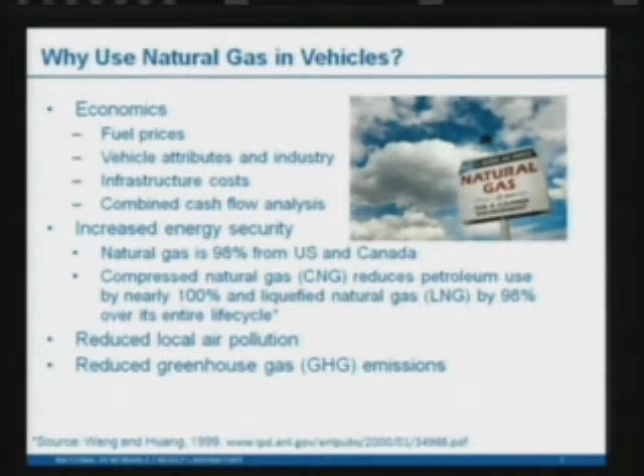But first, I'd like to start with a 30,000-foot view and ask the question, why use natural gas vehicles? There's a lot of companies and individuals using them, which goes a long way to answering why there's a big interest in natural gas vehicles right now. One reason is the economics, which I'll spend a majority of my presentation on, looking at fuel prices, vehicle attributes, the vehicle industry, and the infrastructure.

Another major advantage of natural gas vehicles is increased energy security. Natural gas is 98% from the U.S. and Canada, and right now, with gasoline and diesel prices skyrocketing because of geopolitical events, it's a particularly timely discussion.

Another benefit of natural gas in vehicles is that if you look at the full life cycle of natural gas, it uses hardly any petroleum, whereas a lot of other alternative fuels use varying amounts of petroleum to extract, grow, or transport. That's another major advantage of natural gas in vehicles.

It also reduces local air pollution and greenhouse gas emissions, which I'll talk about in upcoming slides.

The primary driver for why companies, mostly fleets, want to use natural gas is the difference between the diesel or gasoline cost and the CNG cost. All natural gas projects require an upfront investment that needs to be paid off with fuel savings. That fuel savings has been consistent and growing over the years, and EIA projects that difference to keep growing. So the per GGE, or gasoline gallon equivalent, difference between natural gas and petroleum fuels is projected to grow, and the savings will increase.

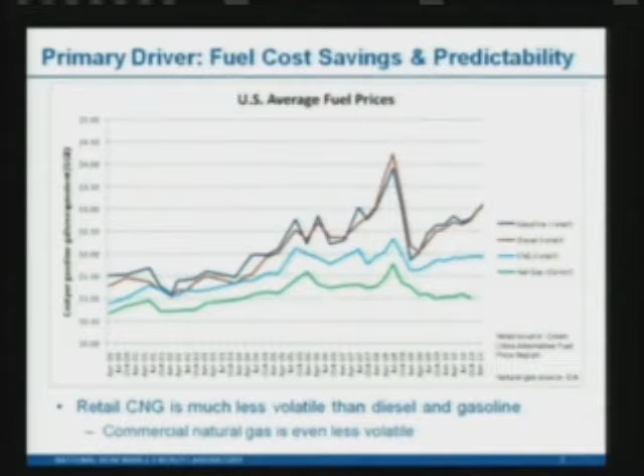Another major advantage of natural gas vehicles is consistency. Those top two lines are gasoline and diesel, which are very volatile. As a matter of fact, right now we're up above $3.50 for gasoline and around $4 per gallon for diesel, which would even accentuate that volatility even more.

That is a major hurdle for businesses trying to plan around this unpredictable cost, because for most fleets and companies in the transport business, fuel is their main cost, and that unpredictability makes it very tough to plan for operations.

To understand the economics of natural gas vehicles, let's first look at how the industry is configured. It's very unique, different from all other vehicle industries, in that we have three major players. There's the original equipment manufacturers - the top two produce heavy-duty engines, and Honda produces a Civic that are dedicated to natural gas.

Then you have conversion kit manufacturers that make kits so you can convert gasoline engines to use natural gas, and these kits require upfitters to put the kit on various vehicles. Two of these conversion kit manufacturers make bi-fueled vehicles that can use both gasoline and compressed natural gas.

Each kit-engine combination, whenever you put one of these kits on a specific engine, requires a certificate of conformity from the Environmental Protection Agency, which basically says it meets emission standards - but that also limits the number of vehicles being offered as a CNG version.

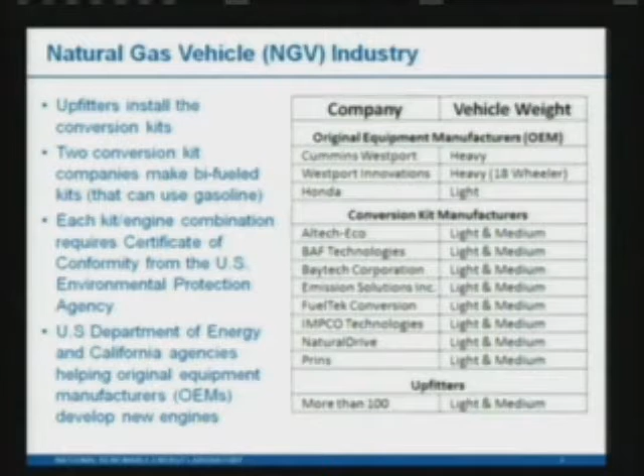There were a couple of other heavy-duty manufacturers that dropped out in the early 2000s - Detroit Diesel and John Deere made one. But the Department of Energy and some California agencies are working with OEMs to produce new heavy-duty natural gas engines.

So now let's look at what drives the cost for natural gas vehicles. It's two main things: the size of the vehicle and the range it needs to travel. Size makes a major difference because smaller vehicles traditionally use gasoline engines, and it's simpler and cheaper to convert a gasoline engine to compressed natural gas because it's spark ignition, sharing many of the same attributes and components. The large heavy-duty engines normally run on diesel, which is compression ignition, and changing from compression to spark ignition requires more changes and more engineering, which increases the cost.

If we look at range, generally the longer the range is for the vehicle, the further it needs to drive, the more tanks and storage capacity you need for natural gas on the vehicles. So as you go from the commuting sedan, which generally needs less than 250 miles, like the Honda Civic, up through the medium and heavy-duty vehicles, which range from 250 to 400 miles, up to the 18-wheelers, which need over 500 miles of range, you increase the required storage capacity. Liquefied natural gas is at the far end of the spectrum, helping people fit more energy into a small container.

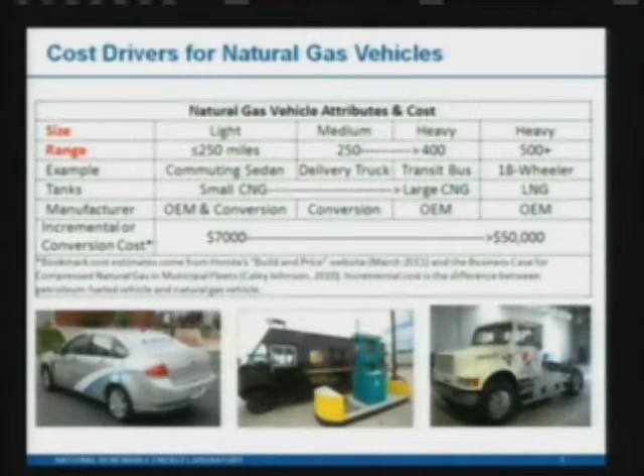As you increase the size and range, you increase the cost from like $7,000 for the Civic. That's an incremental cost, meaning the compressed natural gas version costs $7,000 more than the gasoline version, on up to around $50,000 for the heavy-duty vehicles.

This is a bit difficult to see, but I put a map of the compressed natural gas infrastructure out there. They have 870 stations, and most of them have a fleet based around them, so they can be kind of self-sustaining. Then they're starting to cluster together so fleets can go from one station to another, and they're starting to form various corridors, like you can see in California and up in the New York area.

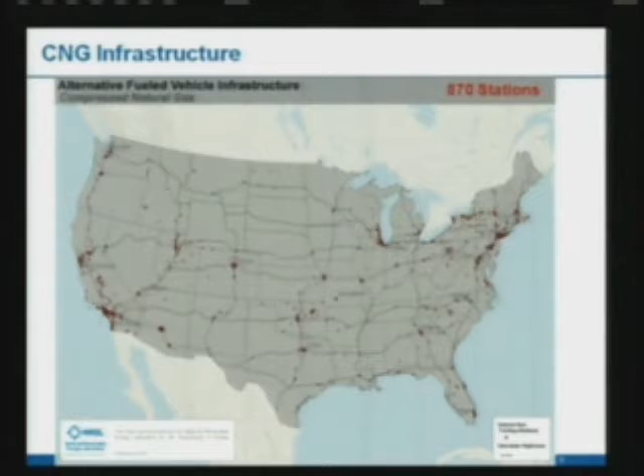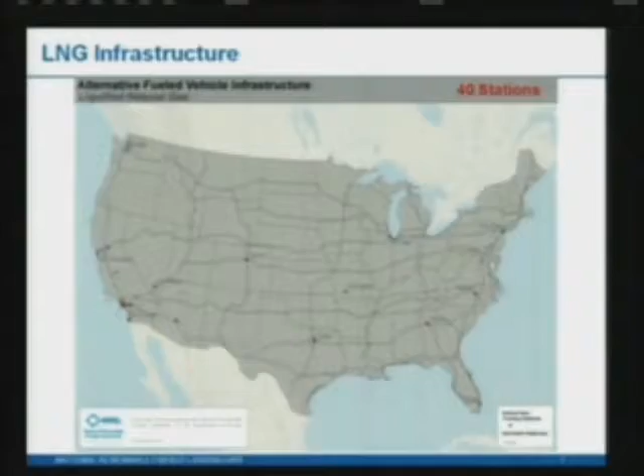Looking at the LNG infrastructure, it's not as well developed yet. It's in earlier stages of development, and you can see there's a couple of major clusters in Los Angeles, then going up to San Francisco, and going east to Las Vegas. There's various ones throughout the East and Midwest, many of which tend to be around 500 miles from each other. So you can see they're starting to work in collaboration, where they can run a heavy-duty truck from one city to the next, make it the whole way, refuel in that city, and then go back.

As far as the refueling infrastructure goes, the major cost drivers are based on how many compressors you need. That's the most expensive part of the refueling infrastructure. Your compression requirements are driven by two things: how much fuel you're running through the station on a regular basis, and how quickly you need that fuel to be pushed out.

If you need a lot of fuel but not very quickly, you can compress and then store it, and you'll have it available as the vehicles come in. But if you need it really quickly, you need a lot of compression capacity, which is very expensive right away. So these top two rows in the table dictate how much fuel gets pumped through the station—the number of vehicles refueling at the same station, and the amount of fuel per vehicle. The next two, the required fueling speed and the break between vehicles, dictate how quickly you need to have that compressed natural gas available.

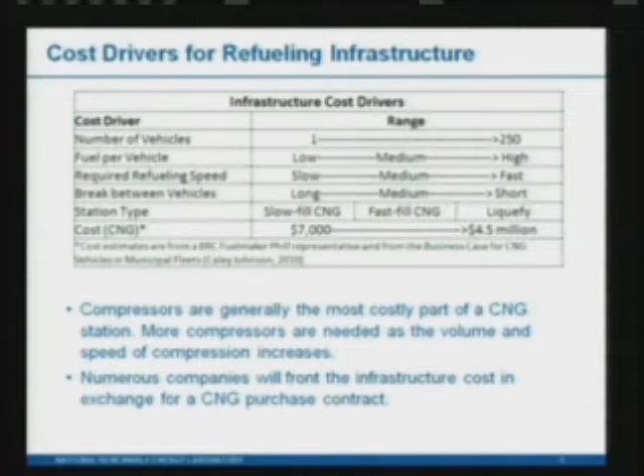Basically the quicker a vehicle needs to refuel, like if they're in a fleet that doesn't have much time and has to get in and out really quick, that makes it more expensive. And if you have no breaks between the vehicles, such as if you have an entire fleet coming in, say after a day of transporting people in a transportation bus, then you have to refuel many vehicles quickly, and it becomes more expensive.

So if you sum up the past couple of slides and look for what fleets are particularly favorable to use natural gas, we start by looking at annual fuel use, because you're paying off the upfront infrastructure costs by fuel savings—by the amount that natural gas is cheaper than diesel. Therefore, the more fuel a vehicle uses, the quicker it'll be able to pay off its infrastructure and the more profitable it will be.

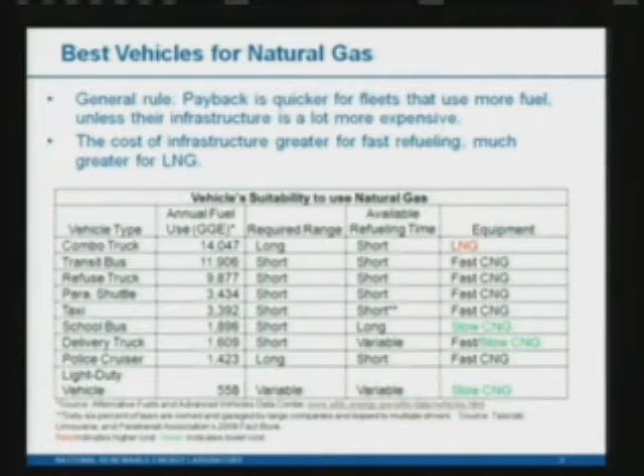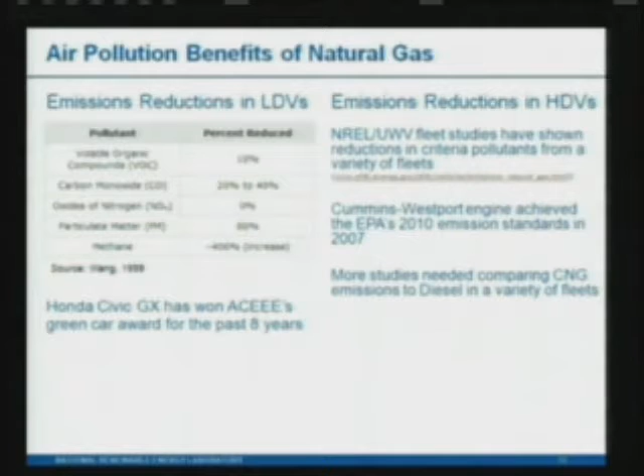And then if you look at the emissions reductions in heavy-duty vehicles, it's less clear because there's so many different scenarios, so many different vehicles, and the diesel vehicle, which is the baseline, has been changing quickly to meet 2007 and 2010 emission standards. But NREL has partnered with the University of West Virginia to do a number of studies on different fleets, and there's a nice summary at that website. It does show that in most of the fleets, there have been very substantial reductions in the criteria pollutants. And just as the diesel vehicles have been striving and going to great lengths to meet the 2010 emissions standards, Cummins Westport had an engine that had already met the 2010 emissions standards back in 2007.

But we need more studies comparing the various fleets' emissions with the diesel emissions as we come closer to 2010. Here's as far as greenhouse gas emissions go.

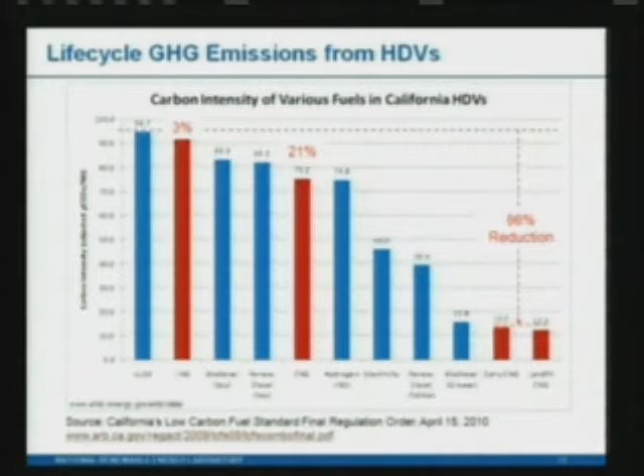I like that the California Air Resources Board has done a pretty good analysis of the life cycle greenhouse gas emissions for their low carbon fuel standards, and you can see that compressed natural gas reduces emissions 21% below low sulfur diesel. LNG doesn't do quite as well on their rating, which is partially because they assume a 10% efficiency reduction, which I'm not necessarily in agreement with. But then there is an 86% reduction if you look at landfill natural gas.

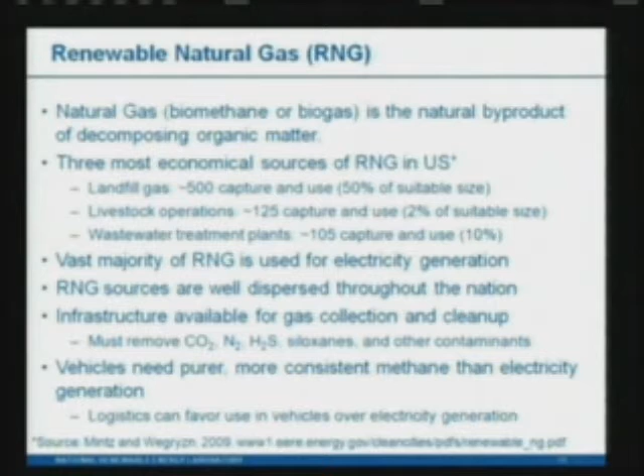And the last thing I want to mention is the renewable natural gas, which is also called biomethane or biogas. It comes primarily from landfills, from livestock operations, and from wastewater treatment plants. The vast majority of it is used for electricity generation right now, and an advantage of this source of energy is that they're well dispersed throughout the nation, and we have the technology right now to clean it up to be able to use it in vehicles. And I will wrap it up with that.

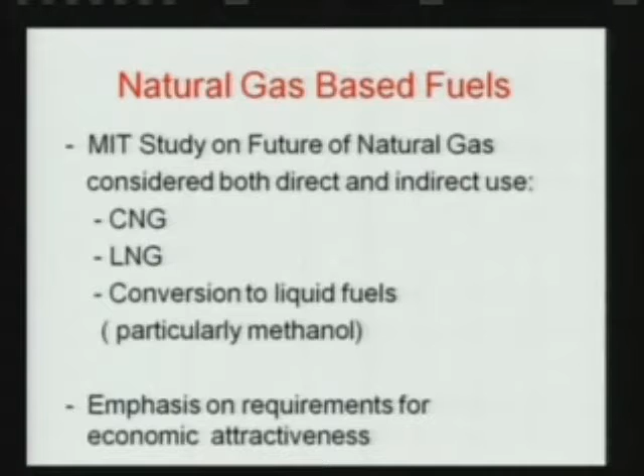In our study, we considered both the direct and indirect use of natural gas for transportation—so CNG and LNG, and also conversion into liquid fuels, particularly methanol. We placed special emphasis on the requirements for economic attractiveness of natural gas as a transportation fuel.

Callie's talked about the economic issues involved in determining where CNG is promising as a transportation fuel. As he mentioned, you have to weigh the fuel cost savings versus the incremental cost of the vehicle relative to gasoline or diesel engine vehicles.

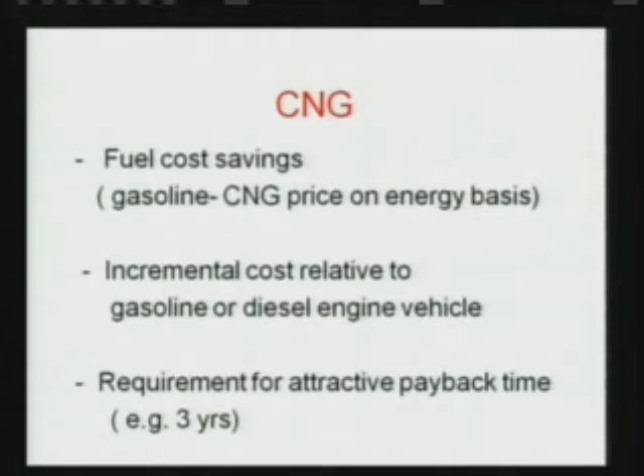Our view, based on previous purchasing and use trends, was that in general you would want a payback time of around 3 years for most buyers to purchase an alternative fuel vehicle.

Given that frame of reference, we made an assessment of the potential impact with particular emphasis on the near term—by near term I mean the next couple of decades. Our conclusion is very similar to what you heard earlier.

The greatest potential is for high mileage per year vehicle market segments, because there the fuel savings is sufficient to pay back the higher incremental cost. The most favorable segment from our point of view was short-range heavy-duty vehicles, and then after that high-mileage light-duty vehicles, generally fleet vehicles.

We made an estimate of the potential impact these market segments could have on security and greenhouse gas goals, assuming 100% penetration. We concluded that you could replace a little over 1 million barrels of oil a day, equivalent to using around 2.5 TCF per year of natural gas. The greenhouse gas impact would be to reduce CO2 emissions from vehicles by around 2%.

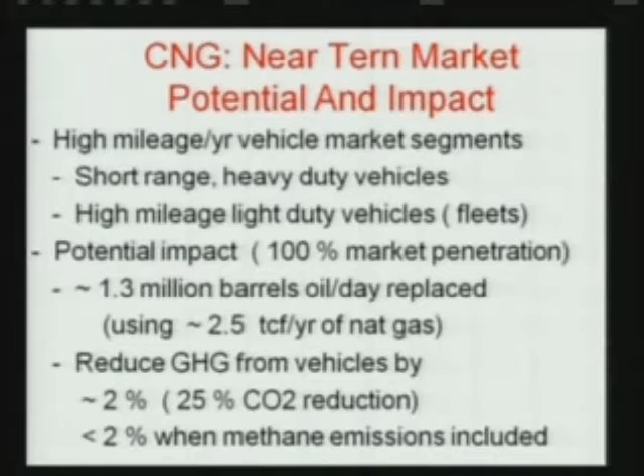Now, what about LNG for long-haul trucks? LNG has the advantage, as Callie mentioned, of having a high energy density, and is thus suitable for long-haul applications.

It does face a number of challenges. One is the high incremental cost—even with a short payback time, high incremental cost can be a concern for purchasers of trucks.

There's also the challenge of the operational limitations of using a super cold fuel. This fuel is at minus 162 degrees Celsius. It has to be stored in a special thermos bottle, and you can only keep it at the cold temperature for a limited period—it has to be used in less than a week. There's also concern about the predictability of the thermal containment of the fuel.

Another challenge is the infrastructure requirement. It's expensive, and potential users like the American Trucking Association have expressed concern as to whether you would have a competitive fueling structure for their truckers if the trucks were to be used on the highway and have to use filling stations on highways. So this assurance of price competition between fuel suppliers is a practical consideration of some significance.

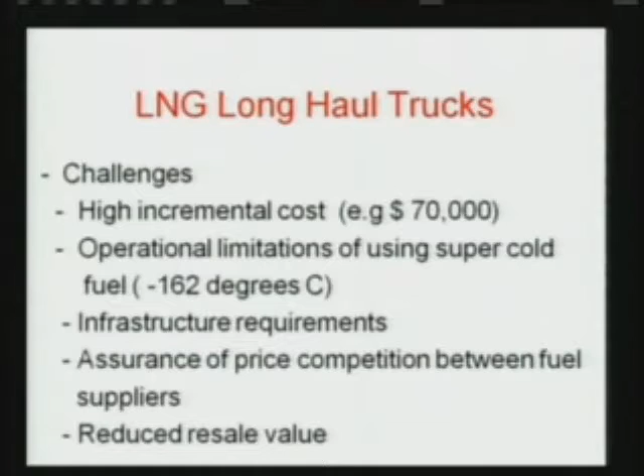Another challenge is the possibility of a reduced resale value for LNG trucks, because a significant number of long-haul trucks are sold internationally after they're used. And then the question arises, what would be their resale value if the country to which they're sold does not have an LNG infrastructure?

Now, these challenges can be mitigated if the LNG trucks are used for long-haul applications between hubs. There, the refueling would be done by facilities owned by the companies, and the drivers would have certainty as to what the fueling availability is. The trucks can be used in a very predictable way, and so this looks to have significantly more potential than on-highway use. And this could be a modest but significant market.

Again, just to get a frame of reference, assuming 100% penetration of this market segment, oil consumption could be reduced by around 0.4 million barrels a day, corresponding to the use of 0.8 TCF per year of natural gas.

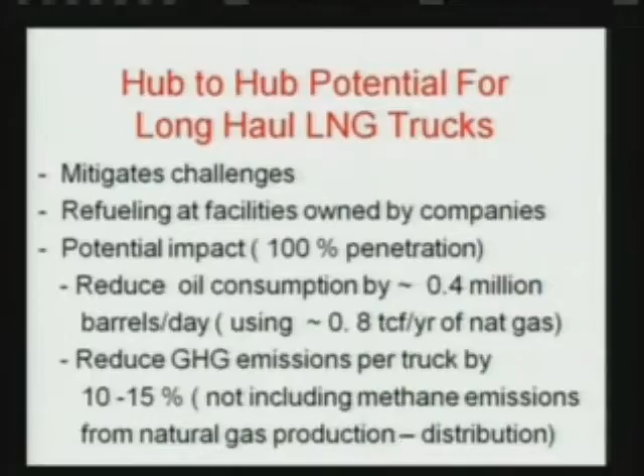It's difficult to estimate the greenhouse gas emission benefit because it depends very much on the efficiency that's assumed for liquefaction. But a representative number is on the order of 10 to 15% greenhouse gas reduction per truck. Now, this does not include the methane emissions from natural gas production, processing, transmission, and distribution. And as I mentioned earlier, this number has gone up, so this can have a significant impact on the degree of greenhouse gas reductions.

Now let me turn to conversion of natural gas into a liquid fuel. There's significant motivation for this. If you could convert natural gas into an economically attractive liquid fuel that you could use like gasoline or diesel, your barriers provided by high incremental cost and the need for a completely new infrastructure would be removed.

Natural gas conversion into liquid fuels has been done for a long time. The uses, though, have not been for transportation. It's been mainly for chemical production. And the way it works is the natural gas goes into a unit called a reformer. It produces what's called a synthesis gas, which is hydrogen and CO. That synthesis gas is converted by a catalyst to various types of liquid fuels. You have a wide range of fuels you can produce, going all the way from diesel to ethanol, mixed alcohols, and then the smallest molecule you can produce is methanol.

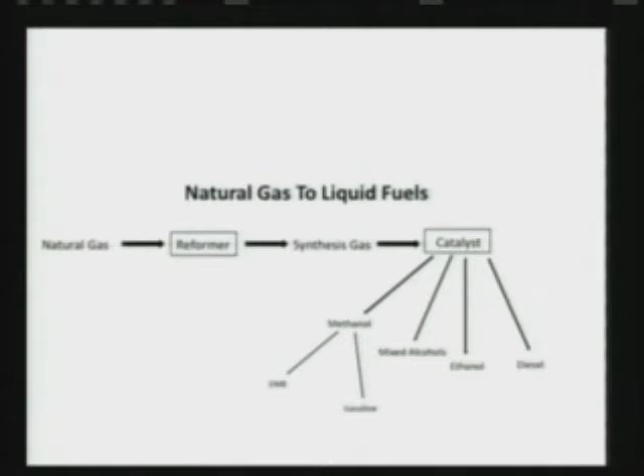And methanol itself can be used as a feedstock for producing gasoline and DME, dimethyl ether, which is a clean-burning fuel for diesel vehicles. Now, of all these liquid fuels, methanol is the fuel that's best established. It's made in large quantities. About 13 billion gallons are produced per year. It's used for the chemical industry, and it's the one that's made most efficiently, about 67% efficient in its conversion.

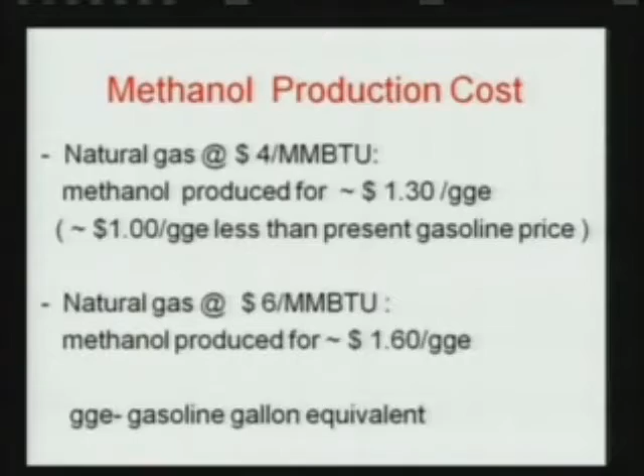Now, if you were to take the natural gas in the U.S. and deploy the current technology, it would be possible to produce methanol at a cost of around $1.30 per gasoline gallon equivalent. That's taking natural gas at $4 per million BTU, so that's essentially $1 per gallon less than gasoline on an energy basis. And even if the natural gas price were to go up to $6 per million BTU, methanol could be produced at a significantly lower cost than gasoline is produced now. Gasoline right now is produced at a cost of around $2.30 per gasoline gallon equivalent. So this is a very important aspect, that it's possible to produce a liquid fuel that could replace gasoline and diesel that actually costs less.

Now, there are two ways that methanol can be used. One is in light-duty vehicles, in flex fuel vehicles, similar to the ethanol gasoline flex fuel vehicles we have now, of which there are around 6 million on the road in the U.S. The additional cost for a vehicle to have the ethanol gasoline capability would be on the order of $100 to $200, so the incremental cost would be minimal, and in addition the driver would potentially have a fuel cost saving. Now, there is legislation being considered to mandate that light-duty vehicles be capable of operating on ethanol, methanol, and gasoline.

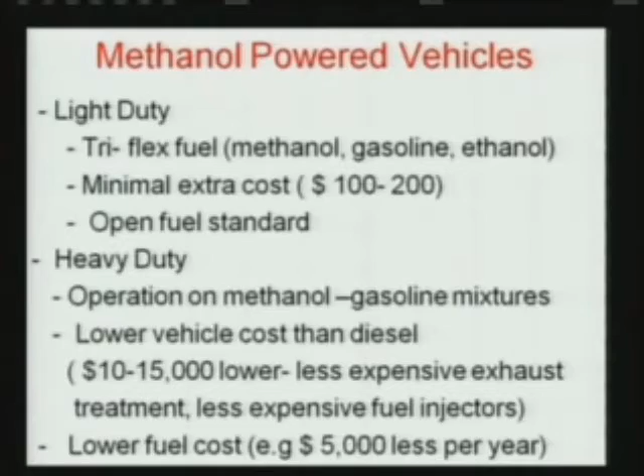The other option is a heavy-duty vehicle, where the vehicle could be operated on methanol and gasoline mixtures, flex fuel, and there would be two economic benefits.

One is the vehicle cost would in fact be lower than diesel, not higher, and the reason is that these vehicles would use spark ignition engines, which have low-cost exhaust treatment systems and low-cost fuel injectors.

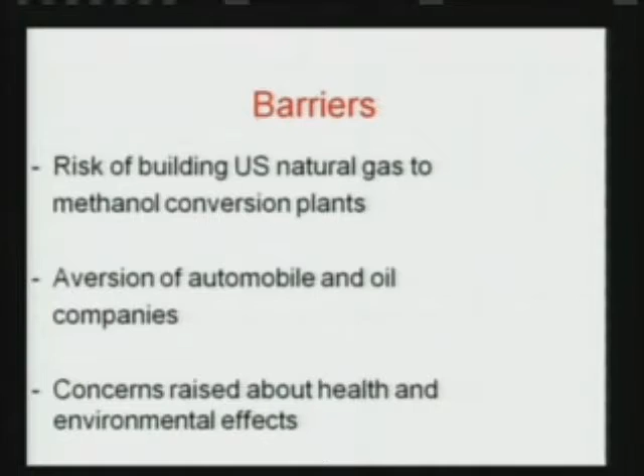So there could be a $10,000 to $15,000 saving, and there could also be a lower fuel cost saving, so there's significant potential economic benefit. There are barriers, the risk in building natural gas to methanol plants. Another barrier is there are not too many people who like this fuel. The oil and automobile companies are not enthusiastic about it, and concerns have been raised about health and environmental effects.

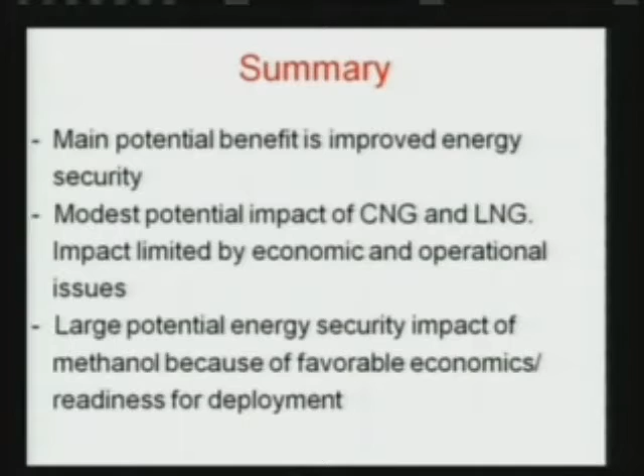So to sum up, our conclusion is the main benefit from natural gas-based fuels is improved energy security, not a greenhouse gas benefit. There's a modest potential impact of CNG and LNG in terms of reducing our oil use, and this impact is limited by economic and operational issues. With regard to methanol, there is a large potential energy security impact because of its favorable economics and readiness for deployment. However, as I mentioned, there are significant barriers to its deployment. Thank you.

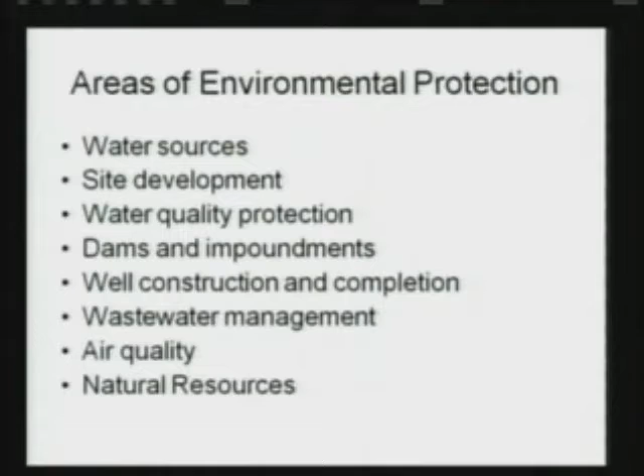And when we first became aware that this was going to be such a huge economic opportunity, the first thing we had to do was find out how many areas of environmental protection this whole operation - the development of these wells and the infrastructure necessary to deliver the gas to market - was going to affect. This gives you an idea of all the areas of environmental protection that we currently interact with regard to this play, and I'll go through each one of these.

First, water sources. Each one of these wells, when they're drilled and hydraulically fractured, because of the technique, the depth, and the horizontal drilling, can take up to 5 million gallons of water to hydraulically fracture. Generally we're told it varies from 3 million to 5 million, but it can be up to 5 million. And when the industry first moved into Pennsylvania, we are a very water-rich state - we have the second most miles of streams of any state in the country, Alaska being first.

86,000 miles of streams in Pennsylvania. It was looked at as an abundant source, and we were never going to have to worry about the quantity available. Unfortunately, they came into Pennsylvania in the springtime when the snow melts and it rains, and so the streams that they saw flowing very healthily in the springtime don't always flow that way. So we ran into issues with the available water, and we had to get on top of that issue.

Much of the water, when it's used in a hydraulic fracturing operation, is what we call consumptively lost, meaning that it is contaminated to a point where it's going to have to be disposed. And in a lot of cases, the common practice was deep well underground injection control wells. So it's consumptively lost. How much water will be needed?

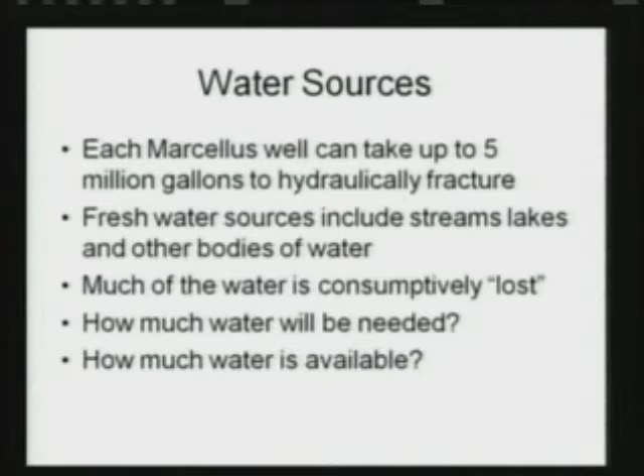We need to get projections of that because we need to figure out whether or not we have that available flow in our streams and our lakes, and that means how much water is available. The good news is we're starting to get data back after a couple of years of being in this business, and we're finding out in the Susquehanna River Basin, which has a separate federal compact, the Susquehanna River Basin Commission,

that oversees water consumptive loss. We're finding out that the daily consumption is no greater than one of our power plants that essentially evaporates, steam electric station that evaporates through cooling towers. So on the grand scheme, what we're finding is it's not as big of an issue as it may originally have been thought. But again, we've only been at this a couple of years, and the industry has not completely ramped up at this point.

So water sources was an issue. Site development. These pads where they construct the wells, and generally they'll construct a pad, a good-sized pad, maybe 6 to 8 acres, and then they'll drill multiple wells off these pads. So we have these well pads being constructed in the northern part of the state, the north-central, northwestern part of the state that are primarily forest, or even a lot in agriculture as well.

So we have concerns about the erosion and sediment coming off these construction sites, and then post-construction stormwater. What type of post-construction site characteristics are going to be left on the landscape, and are you increasing stormwater runoff, thereby increasing erosion in your streams as well?

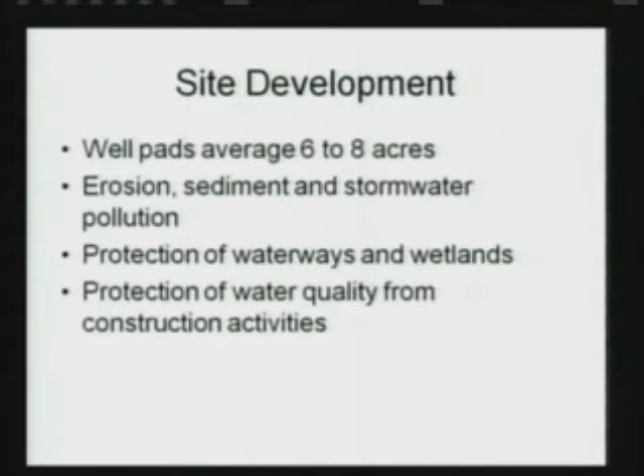So we also had to consider the protection of our waterways and our wetlands. A lot of wetlands, given you might assume the number of streams that we have, and we don't want construction on these well sites impacting or destroying wetlands. So that's another big issue that we had to get our hands around.

And then finally, protection of the water quality. Construction of roads and pipeline facilities and the well pads themselves, the wells themselves, has the potential to impact the stream, again, in terms of erosion and sediment. But we have stream crossings where the roads have to cross streams, pipes have to cross streams. So we're very concerned about that. So site development issues were also a big concern for us.

Well construction and completion. And what we consider completion includes what everyone knows as hydraulic fracturing, or for short, fracking. So in constructing the well, we have to make sure that we have proper regulation in place requiring well casing that meets certain standards to prevent gas migration.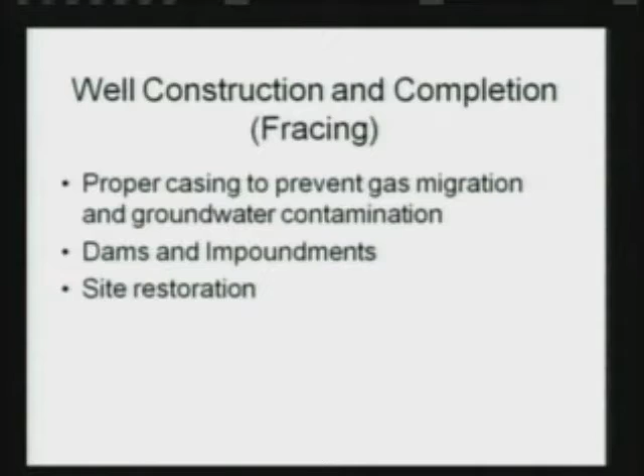We have naturally occurring natural gas in shallow formations, and a lot of times when these wells get started, they hit these shallow pockets, if that's what you want to call them, unknowingly, and we end up with a gas migration. So proper drilling, construction, casing requirements needed to be developed, and we recently enacted new regulations in that area.

A lot of these activities involve the construction of dams or large impoundments, because what the industry has gone to now over the concern with the amount of available water is recycle and reuse a lot of the water. They've figured out a way to recycle and reuse so they don't have to use as much fresh water.

That involves construction of large impoundments where they manage these flows - fresh water in, hydraulic flowback water in - to mix for another frac job on the same well pad for a different well. So we had to get our arms around the construction of dams and impoundments, meaning we can't just dig a hole and put water in it.

Because if it's okay for fresh water, but if you put flowback water in there and it's not a lined impoundment, then we have an issue with groundwater. That's another issue we had to address. And then finally, site restoration, and this gets back to post-construction stormwater, but it also gets back to issues related to deforestation, and I'll get into that a little bit later. These slides get a little busy because I tried to get as many on here as I could.

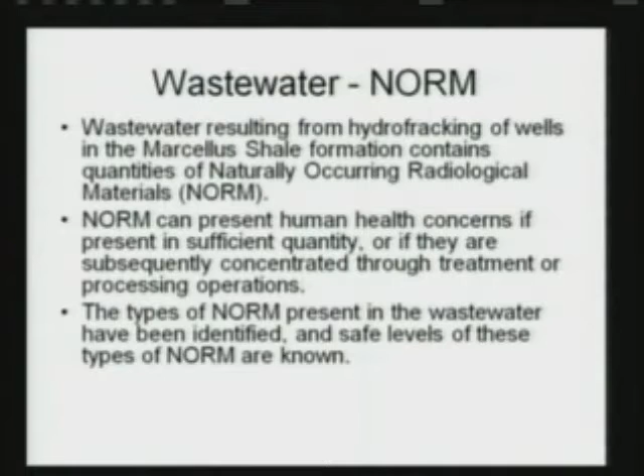Wastewater. Many folks have probably heard that, to no surprise to those of us who've been dealing with this - there are naturally occurring radioactive materials in this formation. This formation has a certain degree, a small percentage of uranium, and uranium obviously decays into other materials, and that's considered naturally occurring radioactive material, or NORM. So the wastewater, when it comes back out of the wells after the well's been fractured, can pick up quantities of this NORM. It can, at certain levels, present some health concerns, especially if it's subsequently concentrated through a treatment process, where this material is actually treated and the solids are dropped out. That can concentrate some of this NORM, and that's called T-NORM, technologically enhanced naturally occurring radioactive material. But nonetheless, it's naturally occurring.

And we have identified the types of NORM in this wastewater. We've done pretty extensive sampling on our own, and the industry has also provided us with a lot of data that has given us an idea what's in the wastewater and what levels these parameters are present. We've determined right now there's no immediate hazard at these levels, but we're going to take precautionary controls. We're going to get out ahead of this. We're going to require monitoring of the wastewater. We're going to also accelerate the frequency at which downstream drinking water intakes may have to monitor their water, just to make sure, to be on the safe side, that what we're seeing now continues to be seen into the future.

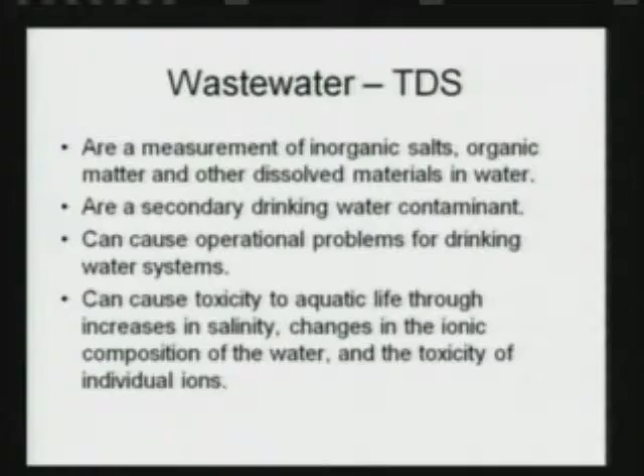The other parameter in the wastewater is the total dissolved solids, and these can run very high. Again, this formation, being a shale, is an old seabed, so it's essentially loaded with salts. So when you fracture this material and you put water in there to fracture it, it comes back as very strong salt water. So there are problems with the TDS. They are a drinking water contaminant, albeit for what's considered secondary effects, meaning taste and odor, and they may discolor laundry or prevent your dishes from getting clean. But high TDS can also cause other operational problems at drinking water systems, such as the formation of disinfection byproducts, which some are known to be carcinogens, so we have to keep an eye on the TDS. And then finally, it can cause toxicity to aquatic life in streams if the TDS isn't managed properly.

We did an analysis that showed that our rivers and streams had a very limited capacity to take additional TDS. There are a lot of legacy loads of TDS in our streams. Many of our streams are affected by it, so we had to get out ahead of that issue as well. There was a growing demand for the capacity of the streams, and we have a number of different industries in Pennsylvania, and we wanted to make sure that we protected the economic development of all industries by not using up all the assimilative capacity, making it available to everyone.

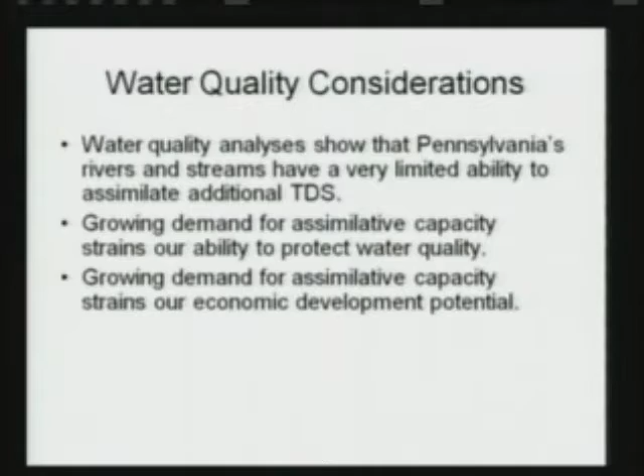We passed a new regulation last year that deals with TDS and requires this type of wastewater to be treated to a very stringent standard. Essentially, this type of wastewater has to meet the drinking water standard of 500 milligrams per liter before it's discharged to the stream.

So in summary, those are the areas that this new industry touches on in Pennsylvania. Our department is addressing these as quickly and as well as we can, and we intend to continue to do so. Thanks.

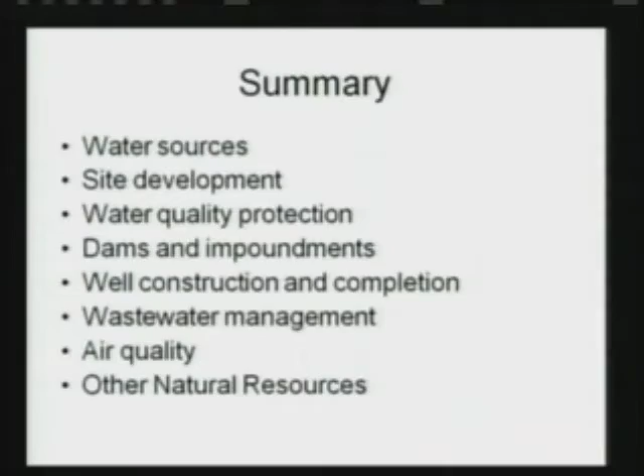Thanks very much, Dana. Next, very pleased to have Lynn, or Lyndon, full name, I just learned that, Pittenger, who has 30 years of experience as a petroleum engineer. He's currently a consultant. Before that, he had a long career with Unocal, as well as Occidental Oil and Gas in Houston. He does work across the country, but he was close enough that we were pleased to have him today.

Part of this long-term prospect for natural gas as a fuel source is, as you heard, motivated partly by the price differential and what we hope is a fairly abundant supply. But I think we need to put that in context, that it's not going to be something we just turn on overnight, and that's what Lynn's going to talk about. So please take it away.

So a significant change in policy can lead to a significant change in the demand for a product. And shale gas has been supplying, or is currently, the main source of growth in the overall supply of gas of domestic resources in the country.

Sometimes in the press it's referred to as a manufacturing process that's consistently repeatable across the extent of the play. I think that might be an optimistic representation. For the last year and a half, I've been collaborating with Art Berman in articles in World Oil, as well as some of the blogs he writes, looking at the production data, publicly available production data from thousands of wells, looking at the ultimate recovery from these wells.

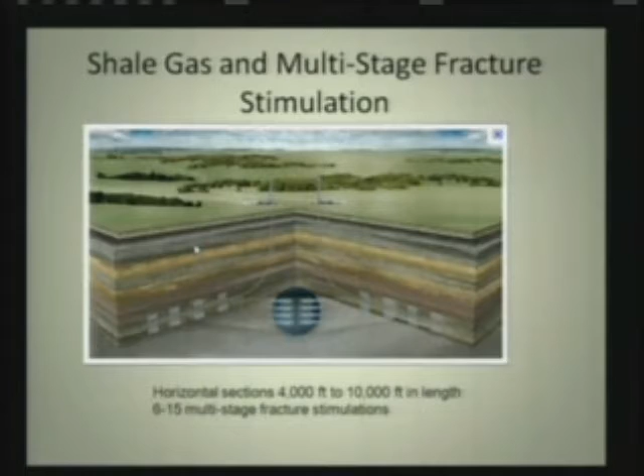What is new about shale gas? They've been drilling through the shale gas formations for over a century. It's been known that they're the source of gas. They always bled gas; the cuttings when they came to the surface showed that they were exuding some gas. It just wasn't recognized as a commercially producible formation. The first horizontal well was drilled in 1929, but the real commercial application of horizontal wells took off in the 1980s. Fracture stimulations have been performed since prior to 1950.

The Mitchell company started drilling vertical wells in the Barnett Shale in the 1980s. The application of horizontal wells started in the Barnett Shale in 2003, and within 2 or 3 years, many companies were competing for acreage in the area. It all of a sudden turned into the hottest play in the country.

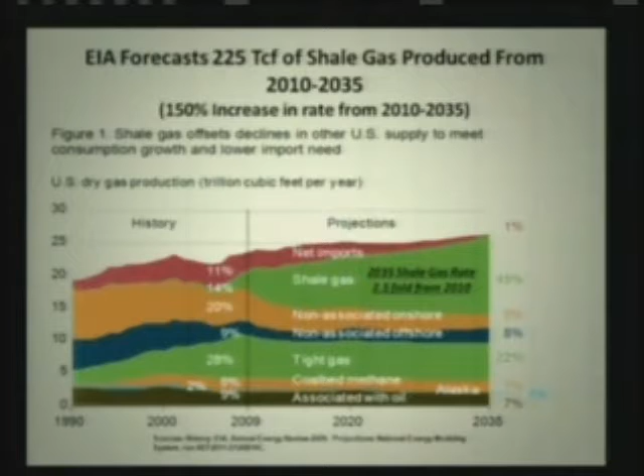Shale gas, on the other hand, is growing by 150%, and at the exit rate in that graph it's producing 45% of the overall gas. The amount of shale gas produced from 2010 to 2035 is about 225 TCF. That's just a number to keep in mind, I'll refer back to it a few times in the presentation.

Just some of the word slides. The Potential Gas Committee was developed out of, I think, the Colorado School of Mines. I don't know that much about it, but it's one of the better respected evaluations of natural gas resources in our future. It's updated about every 3 years.

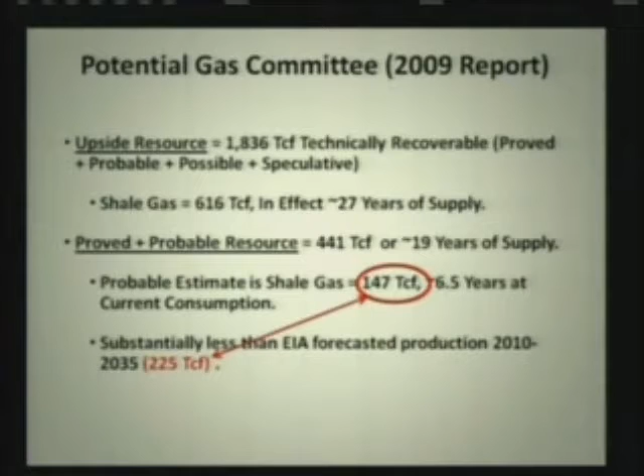Their proved and probable estimate of natural gas is 441 TCF, with shale gas contributing about 1/3 of that. The volume they estimated in 2009 is 147 TCF, which compares to about 2/3 of the 225 TCF that the EIA has in their forecast. Now, that 2009 study had a dramatic increase in the amount of shale gas assumed, and it's very hard to see in the future, so the potential for these numbers to change in 5 or 10 years is quite substantial. That disconnect, I'm not sure, is necessarily significant.

This is a production profile or forecast of the overall shale gas contribution to natural gas supply, based on the individual plays. I show this to illustrate the impact of four key shale gas plays. The Barnett Shale is the oldest, developed with vertical wells in the 1990s, converting to horizontal wells in 2003.

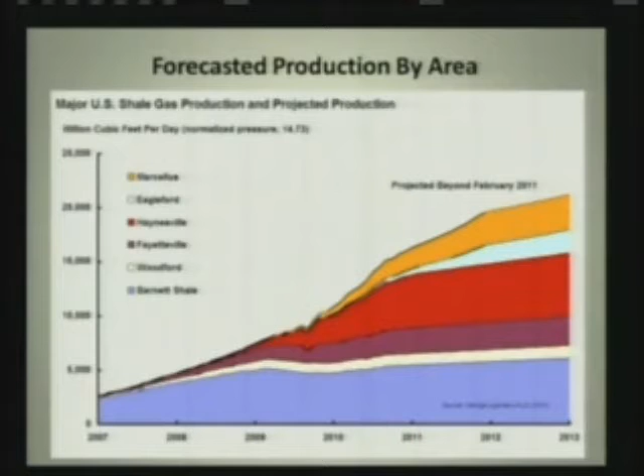With the improvement in gas prices after 2003, Barnett became the hottest play in shale gas. Next in the time frame is the Fayetteville in northern Arkansas, followed by the Haynesville, which is currently the most important source of growth in shale gas, and potentially in this time frame contributes about 1/3 of the overall shale gas profile. Then the Marcellus, currently rapidly growing, which because of its large areal extent has potential for being a very important source.

This is collaborative work with Art Berman, looking at publicly available data. This public data has monthly production volumes for each of the wells, or many of the wells in the plays, and they're searchable, so we can identify which production horizon they come from, the time they were drilled, and who operates the wells. After looking at several thousand wells in the Barnett, Art and I estimate the ultimate recovery of the wells is about 1.2, 1.3 BCF per well.

Most operator investor presentations support, say, 2 to 2.5 BCF. In the Fayetteville, very similar findings, 1.2 BCF versus 2 to 2.5 BCF. In the Haynesville, we're seeing 2.5 BCF for the average of the wells. It's much more problematic to estimate the ultimate recovery in the Haynesville because, one, there's not as much data, and two, the wellhead flowing pressures are changing, and the public data doesn't have much information on how those surface flowing pressures are changing.

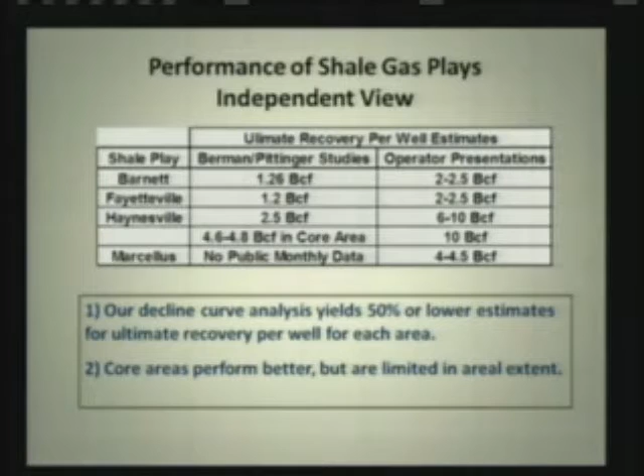So certainly there's a lot more uncertainty in that estimate, but we see a core area of 4.6 to 4.8 BCF per well, with the main operator in that core at 10 BCF per well. The Marcellus, unfortunately, the state does not require publication of the monthly production data. They do provide cumulative production on a 6-month basis, and I'll show one graph on that. So we don't have any particular conclusions on the Marcellus, but many operators support a 4 to 4.5 BCF per well estimate.

In summary, the two main points of the presentation are: our decline curve analysis tends to lead us to estimate the recovery of these wells at about 50% or lower than what is generally discussed in investor presentations. And as importantly, the core areas where wells are performing better are quite limited in extent, say 10 to 20% of the overall area of the plays.

So I just want to go through quickly each of the key plays we're talking about. The Barnett data is substantial. We have 40, 50 months of data in some of the older wells, and we're seeing fairly established decline trends. This curve represents the group average curves, about 450 wells with fairly established decline trends. And we're seeing a weighted average recovery of 1.2 to 1.3 BCF per well, based on the average including...

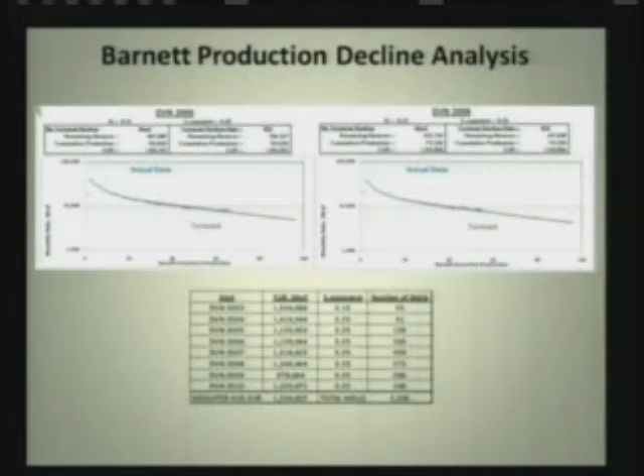2,300 wells in that database. Fayetteville, 1.2 BCF per well for 2,000 wells. Once again, there's a lot of data and fairly regular late-time trends where we've got 20 to 30 months of data following a fairly established pattern. So it leads us to be fairly confident in these two trends.

The Haynesville is much more difficult. It's a much higher pressure formation, actually initially at lithostatic pressure, meaning the gas is holding the fractures open at these initial conditions. Because of this extremely high pressure, and these being deep formations, the initial rates are very, very high, but the decline rates are also very, very high. We don't have as much data for this trend, and we also see very large flowing pressure and surface pressure changes, so it's much more challenging to evaluate.

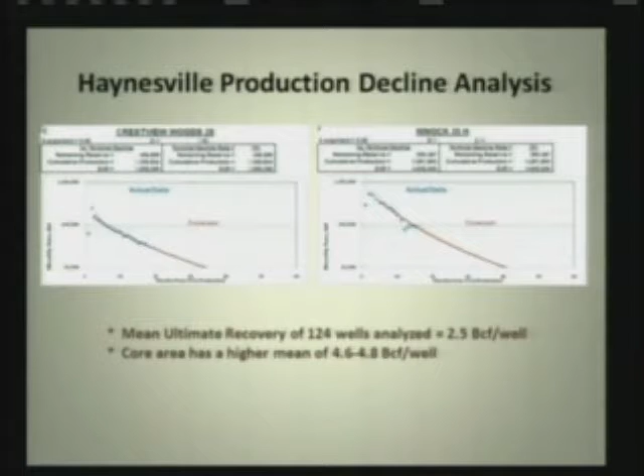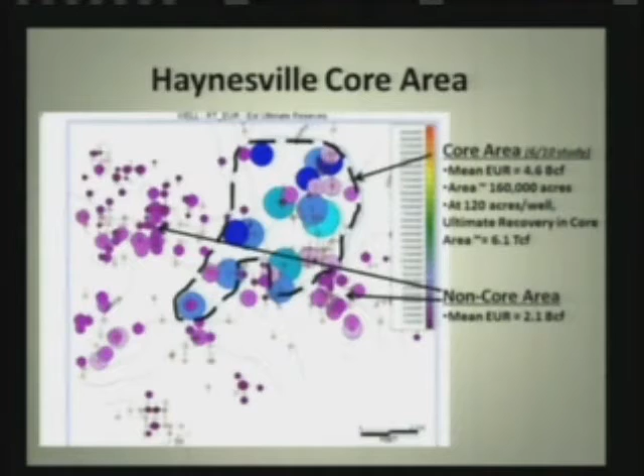Now if we take that 160,000 acres and assume somewhere between an eventual development spacing of 80 acres per well versus 160 acres per well—say 120 acre average spacing per well—that would give us 6.1 TCF out of the Haynesville core area. The Haynesville is about 1/3 of the shale gas, and shale gas is expected in the EIA estimate to produce 220 TCF in that 25-year timeframe. So I think the extent of these core areas in these plays is very important.

And then this is one piece of work that I thought might illustrate the price sensitivity of the resource. It shows the average of 44 wells with 12 months or more of data, and the data points in blue are the actual average of those 44 wells. Then we have a range of extrapolations, and this is the basis of most of the debate about the reserves of shale gas wells.

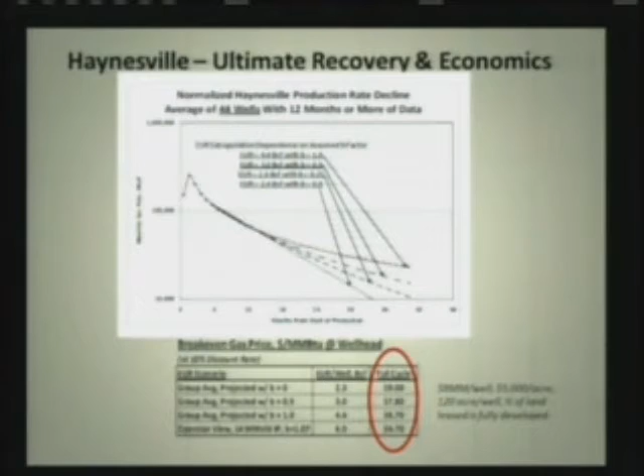Are these wells going to continually flatten and stabilize and produce over a 40, 50, 60-year timeframe, or are they going to continue to decline at similar rates as now and have a well life of about 10 to 15 years? Based on our work observing the Barnett shale wells and the Fayetteville, we think we are not going to see as much flattening as is assumed by the operators.

So we have some economics on the lower part of the page, where if you have more of the operator view of, say, 6.5 BCF per well, a higher IP and a flattening coefficient, you're commercial at about $4 or $5 per MCF, whereas much of the play is more in that $9 to $10 range of being commercial.

And then quickly, the data for the Marcellus play is in a different format, so it's hard—you can't analyze it like monthly production data—where we see a couple of counties of outperformance. Susquehanna County is doing very well compared to the average 4.2 BCF type well supported by operators. Bradford County is also doing well. But there's a lot of activity in Washington and Greene County, and the data from those wells is underperforming the curve by a substantial fraction.

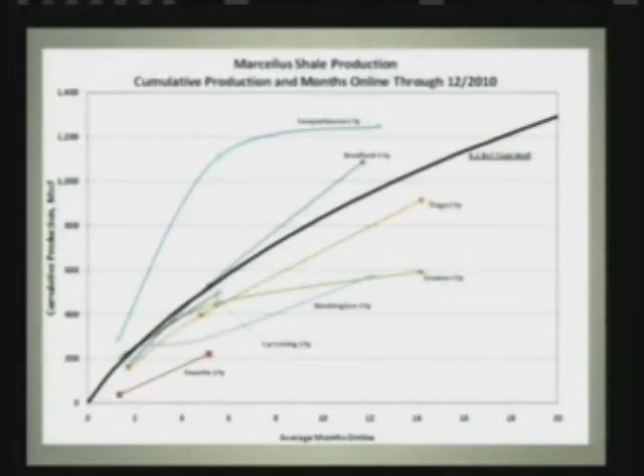I'll skip this, but essentially the main point of the previous slide is that it's a highly competitive market, and you have to lease. The land gets leased up very quickly, and you have to drill on that acreage in the first 3 to 5 years to hold it, typically at 1 well per 640 acres. To get there, much of the rate of drilling recently has been to hold acreage.

The natural gas companies are also in a growth story. I think they're selling their shares of stock more on the momentum of a growth story rather than the overall chance of commerciality of running their business.

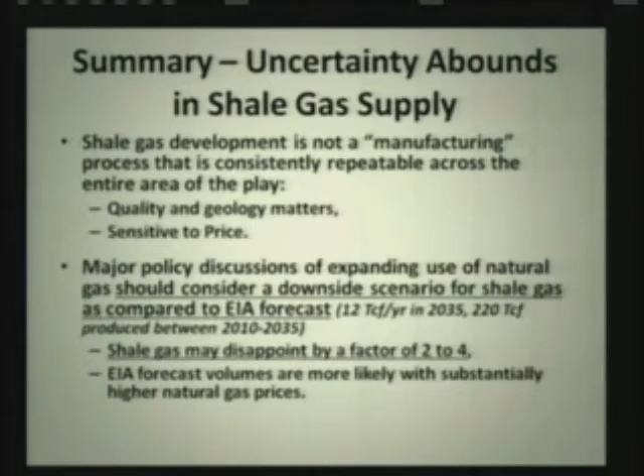So, in conclusion, shale gas is not a manufacturing process, or best be considered not a manufacturing process. Quality and geology matters, and it's going to be sensitive to price. And overall, the shale gas supply may disappoint the EIA forecast by a factor of 2 to 4.

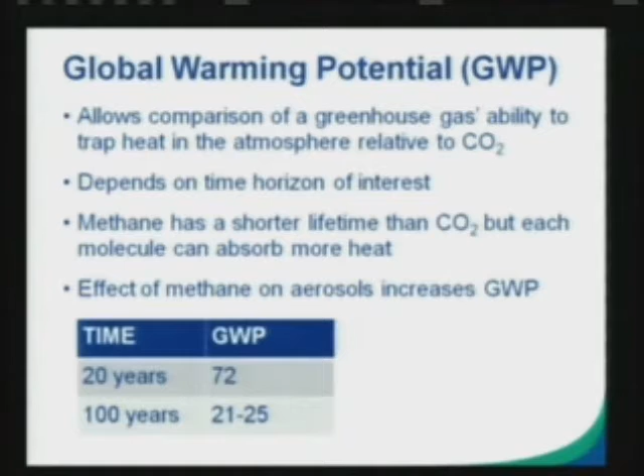So we have to think about using 20 years as the context. I'm going to use a different comparison, coal combustion and natural gas combustion, because there's better data about that. And we can think about the supply chain that Daniel referred to, and really what are the implications of greenhouse gas emissions across that supply chain.

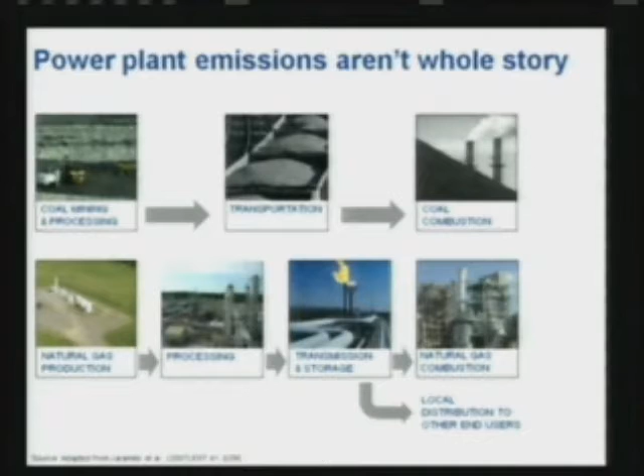There's data about that, and as Daniel talked about, they looked at that in the MIT study. You can quantify that, and this is just some estimates that we have recently put together to try and understand those. Again, this is not the case before us, but to give a context for it, I think the data is far stronger here. But even in this case, we do not have good error estimates. We do not have uncertainties around those two numbers on the right.

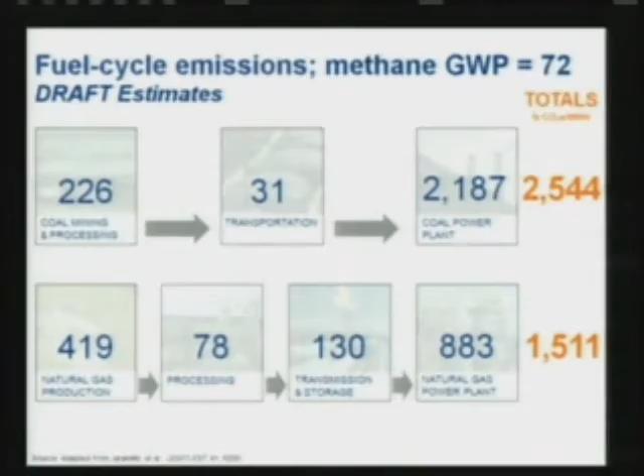That's really what we need, because I could get into a longer discussion about the fact that the uncertainties associated with it mean those are actually overlapping numbers. We cannot differentiate between them because of the uncertainties. That doesn't mean, in fact, they aren't different, but the data quality is not sufficient. This is one of the key points I want to bring out that's relevant to the issue before us today as well: we really are lacking in good quantitative data on the natural gas leak rates throughout the processing, transmission, and use of natural gas.

So that creates a lot of uncertainty in the implications, global warming potential implications of using natural gas. And these numbers, by the way, are with a 20-year estimate.

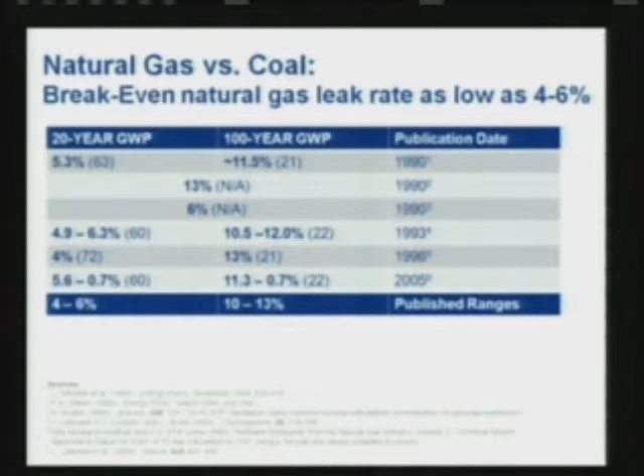So if we go and look at the literature, comparing natural gas to coal, what we find is that the 20-year leak rate break-even point between those two fuels is between 4 and 6%. And the literature's got some fuzziness in it. There's even an issue in the literature now about what the appropriate global warming potential of 20 years is. There's some later data that suggests 72, which is the consensus right now, is probably too low, but we stuck with 72.

But what we care about here is if we do it to gasoline and diesel, that number from 4 to 6 goes to 1 or 2%. So if you have a leak rate of 1 or 2% in the process of using it as a transportation fuel, you are going to be at the break-even point. And it's actually, in most cases, closer to the 1% than the 2%. But I put it as a range because I think that's a better representation of the uncertainty in the underlying analysis.

But our data is not as strong as we'd like. There's really a lot of uncertainty here. And if we look at the 100-year, it's 3 to 5%. Those are very low numbers because, as Daniel said, EPA has raised their estimate to 2 to 2.5% upstream leakage.

So that means, based on the best available data, which still has a lot of uncertainty, there's a lot of opportunity for refining those numbers. There's also opportunity that some of the uncertainty is that these numbers could be underestimates. The last revision was doubling the estimate. There's some other data to suggest it might be higher than the 2 and 2.5%.

So what that says, going back, is that in the 20-year time frame, a natural gas vehicle is a net increase of net radiative forcing, meaning it's negative relative to how much impact it's having on the global climate. It's not neutral, as Daniel says, in the 20-year time frame, most likely, best available data, there's lots of uncertainty, and I'm stressing that carefully because we are pushing really hard. We got to get better data to sort this out.

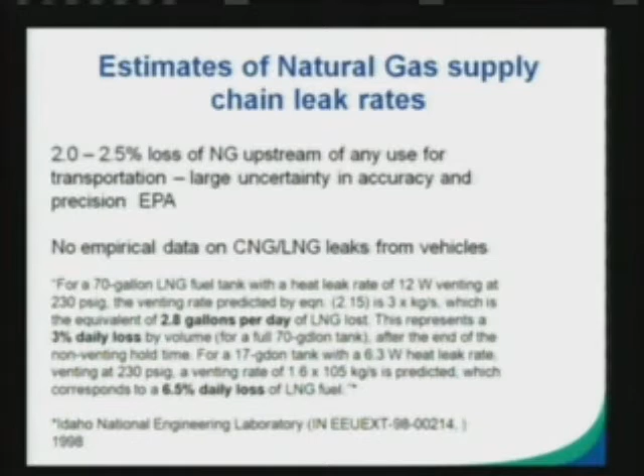We need more transparency with industry. We need to understand what the issues are. There is not good transparency across these data, and there's fights to even make it more transparent. That does not even include the actual use in the transportation sector itself.

So what are the leak rates in CNG and LNG vehicles? There may be some data out there. It's not very visible. The data that we can find is limited, and it suggests that those numbers are considerably higher.

So what we end up doing is, if we go back again to the 100-year global warming potential, which is probably what Daniel was referring to, we're now talking about neutral. It's going to be worse based on the data that we currently have in the short term, possibly break even in the longer term, but the error bars on it are too large.

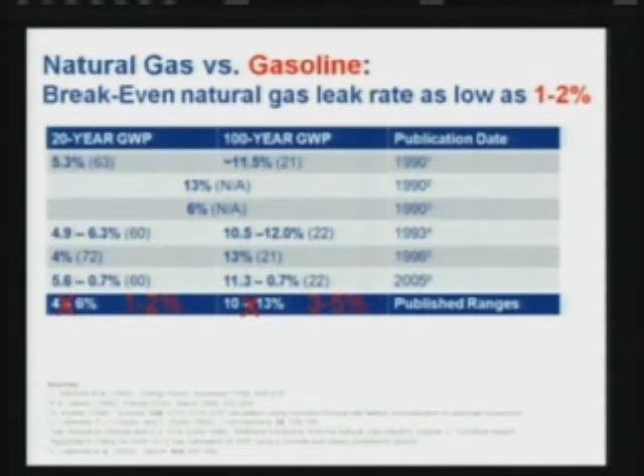We shouldn't be making good public policy without better data and ensuring that we really get everyone working together, including industry, on all sides of this. Let's get the best data. Let's use the science to really answer this question, because right now there's too much uncertainty to really understand the implications. But the indications are, from a transportation fuel, we will, as the best data now, before we try and reduce the leak rates in the industry, we would actually be increasing net radiative forcing. Thank you.

Okay, so what you've heard from our presenters is a whole lot of information about what we called in the briefing known as challenges, right? There's a lot of potential benefits, but there are clearly challenges. And I think what we're going to try and do now is take a step back and see which things might be insurmountable, and which ones are manageable, and which ones are maybe less significant than maybe we thought. And we've tried to piece this, we've brought together people who haven't probably been on a panel together to do this.

But there is one organization that tries to wrestle with these issues and make the case and address these issues from a policy and a technical standpoint, and that's Natural Gas Vehicles for America, or NGV America, and Richard Kolodziej, their president, is here, and I just wanted to give him the opportunity to comment or maybe pose his top question from what he's heard from the panel today, and then we'll open it up to the floor.